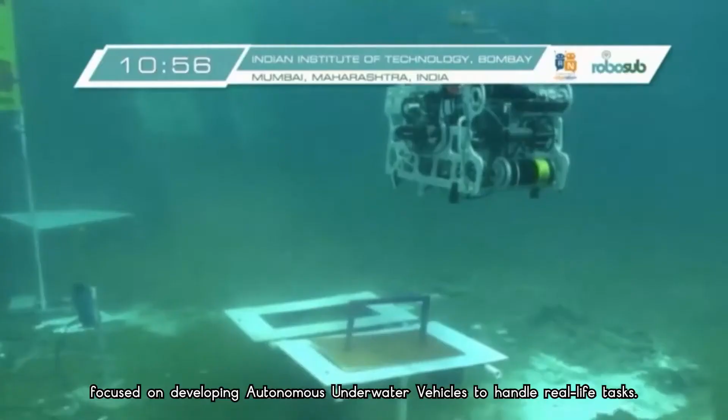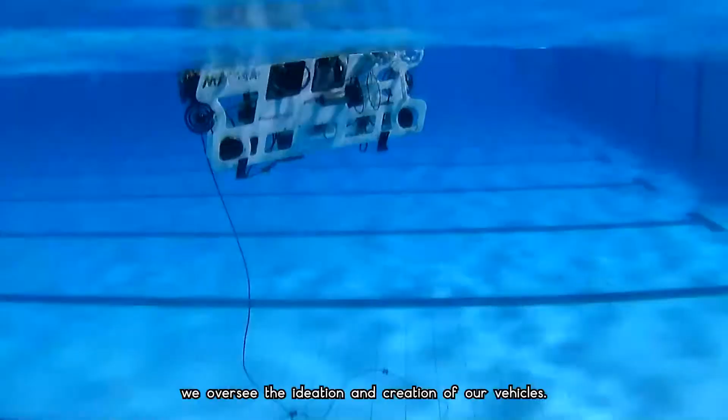AUV-IITB is a multidisciplinary team of 55 members focused on developing autonomous underwater vehicles to handle real life tasks. Through the consistent effort put in by members of our four subdivisions, we oversee the ideation and creation of our vehicles. Our flagship series is named Matsya, which is derived from the Sanskrit word for fish.

Hi, I am Sanjyoti Naran, a fourth year undergraduate from the Department of Electrical Engineering at IIT Bombay. I am the current team leader of AUV-IITB. Hi everyone, I'm Akshat Rajlat, a senior undergraduate student at the Department of Mechanical Engineering, IIT Bombay. I'm one of the current team leaders of Team AUV-IITB. Hi, I'm Mohan Abhyas, fourth year undergrad from Computer Science Department, and I'm one of the current team leaders.

I'm Nandagopal, a third year undergraduate from the Mechanical Department, and I'm the Mechanical R&D head of the team. And this is the Mechanical division of the team. Hi, I'm Shubham, third year undergrad from Chemistry Department, currently the Electrical Subsystem Head and the Design Team Head. And this is the Electrical Subdivision of the team. Hi, I'm Richard, third year undergraduate from Electrical Department, and I am the Software Subdivision Head. And this is the Software Subdivision of the team.

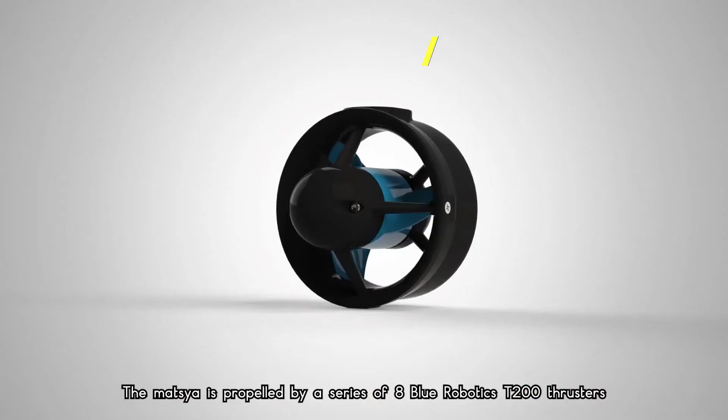The Matsya is propelled by a series of 8 Blue Robotics T200 thrusters based on brushless DC technology. The chosen thruster configuration ensures mobility in all 6 degrees of freedom while minimizing undesired residual torques. Special emphasis is given to ensure maximum torque is available in rotational axes for efficient control.

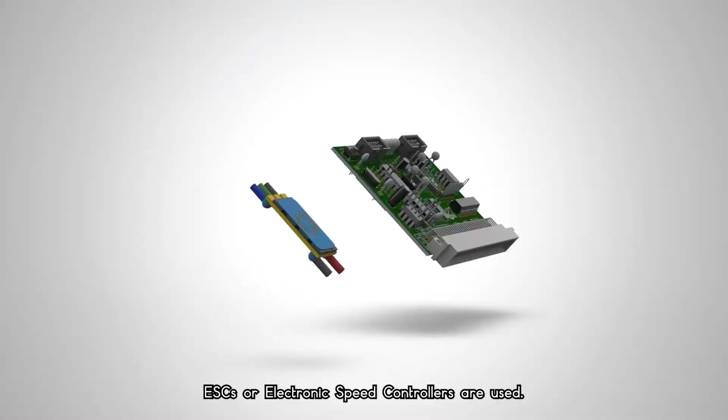To control the speed of the thrusters, ESCs or electronic speed controllers are used. PWM signals generated by the GPIO board are also applied. The board also features double redundancy in case one of the microcontrollers fails, thus increasing the reliability. It also features the thruster kills, which are the hard kill and the soft kill.

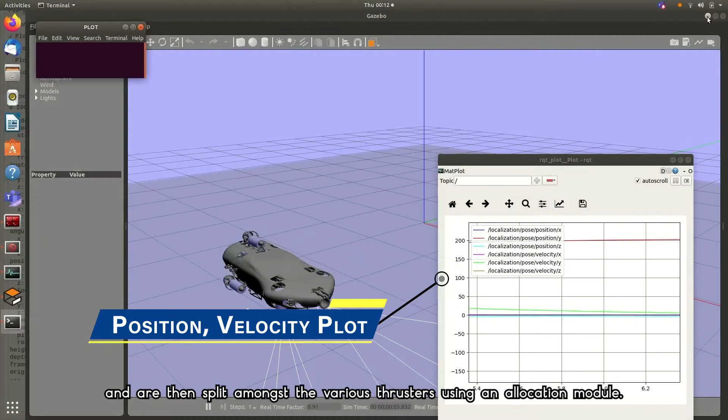Control is achieved by a PID-based feedback control structure. The required control inputs in the 6 degrees of freedom are calculated and are then split among the various thrusters using an allocation module. Finally, PWM values are computed using a thrust versus PWM mapping and are then sent to the various thrusters using the CAN bus.

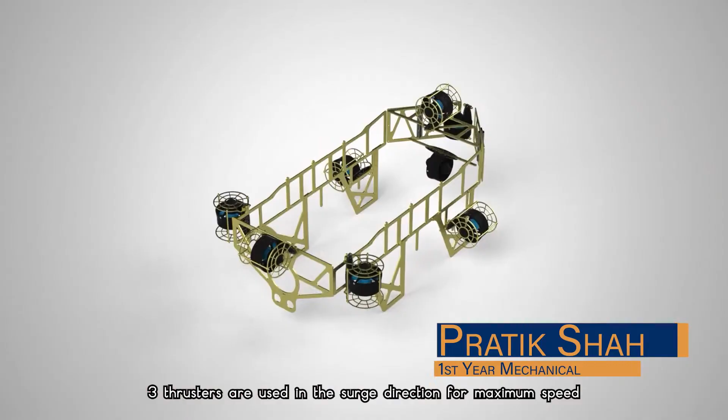Let's get acquainted with the specifications. The first thing required while designing the propulsion system is the requirement of speed in all directions and the total degrees of freedom. After considering the power requirements, the number of thrusters and their orientation is decided. Moving on to thruster configuration. We have a total of 8 thrusters. 3 thrusters are used in the surge direction for maximum speed, along with 3 in the heave direction. The 3 heave thrusters also help in pitch control.

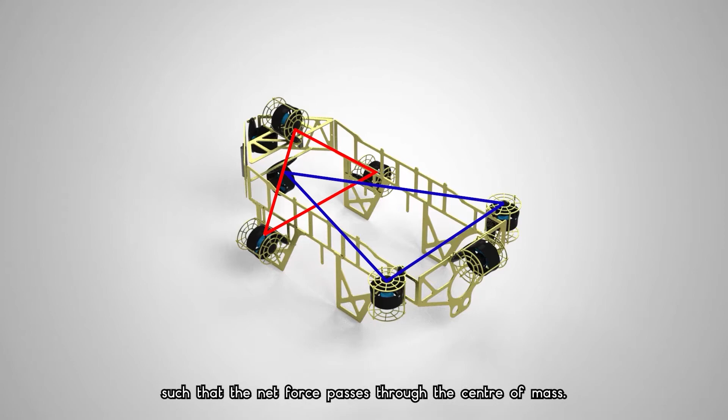A minimal amount of thrust is required in sway because there are few resistive forces, and so we only use 2 thrusters. We position the surge and the heave thrusters at the vertices of 2 distinct isosceles triangles such that the net force passes through the center of mass. This eliminates any undesirable torque. The sway thrusters are positioned as far apart as possible to give higher yaw torque.

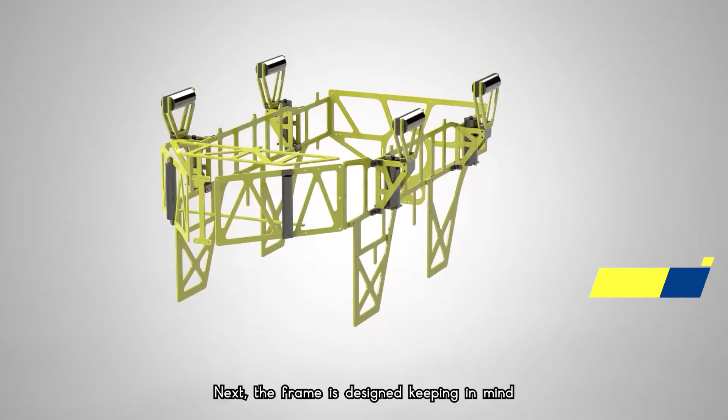Next, let's learn about frame analysis. Next, the frame is designed keeping in mind the positioning of thrusters, and its structural integrity is tested at maximum operation force via static structural analysis. Finally, we perform CFD analysis to estimate the drag force that the vehicle will experience and its maximum achievable speed.

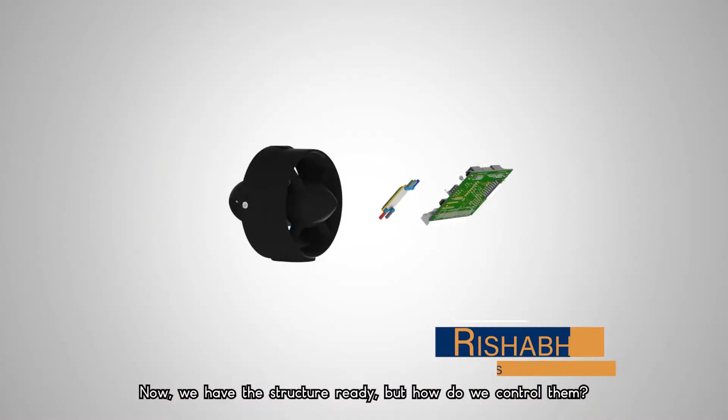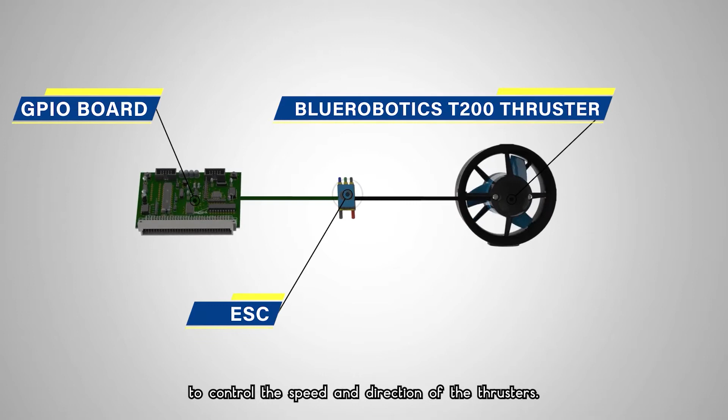Following all the mechanical aspects, we now examine the electrical elements. Now we have the structure ready, but how do we control them? To control these 8 thrusters, we have 8 ESCs present in the ESC hull. These ESCs use the PWM signals generated by the GPIO board to control the speed and direction of the thrusters. The ESCs can handle very high currents required by the thrusters, which can reach up to 25 amps. To tackle the heat generated by the ESCs, they're placed in a separate hull away from the main electrical stack.

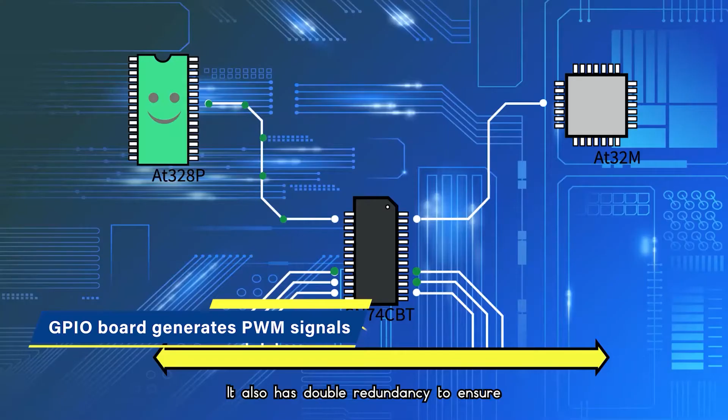Now it's time to meet the mastermind behind controlling the ESCs, the GPIO board. The GPIO board is responsible for producing PWM signals. It also has double redundancy to ensure that the board remains functional in the case that one of the 2 microcontrollers fails. This increases robustness and fault tolerance. The 2 microcontrollers utilized are ATmega 328P and ATmega 32M.

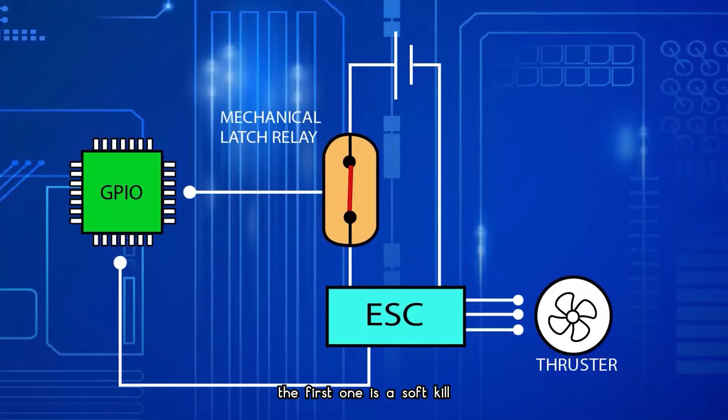Matsya 6 has two layers of kill protection against system failures. The first one is soft kill, which shuts the thrusters by cutting off PWM signals. The second one is hard kill, which shuts down the vehicle by breaking the connection between battery and thruster with the help of mechanical relays.

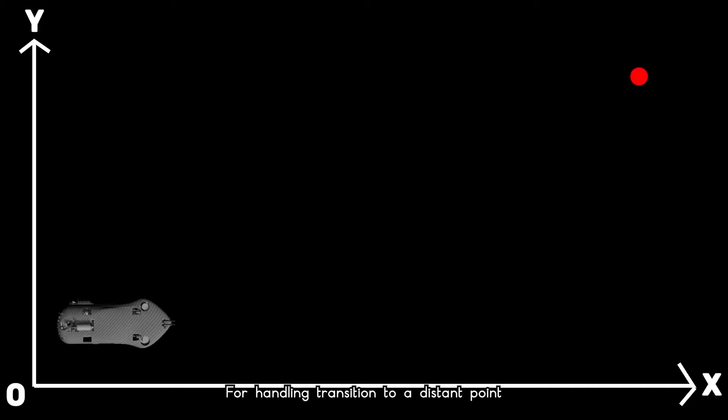Now we know how to propel the vehicle if we have the PWMs. But how do we calculate them? Welcome to the control system. For handling transition to a distant point, the navigation module generates a path depending on the requirement or the way we want to traverse the route. The navigator achieves this by breaking down the points into a series of set points.

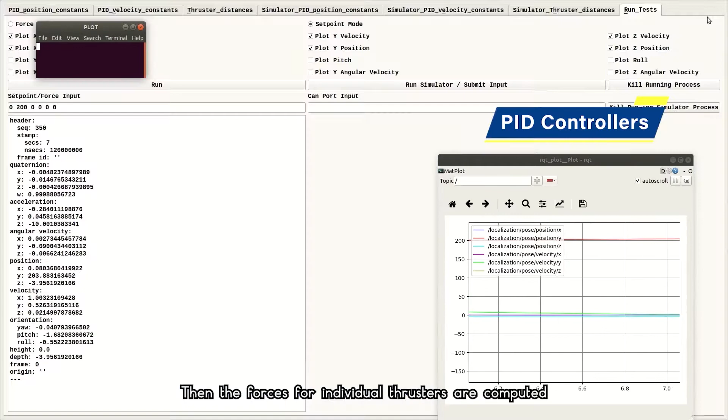The set points are then fed sequentially to the 6 PID controllers, which then compute the required acceleration in each of the 6 degrees of freedom. Then the forces for individual thrusters are computed by the allocator. After the computation of these forces, the PWM force model computes the required PWM signals, which are then sent to the thrusters to achieve the required propulsion. Congratulations! Now you know everything to design your own propulsion system.

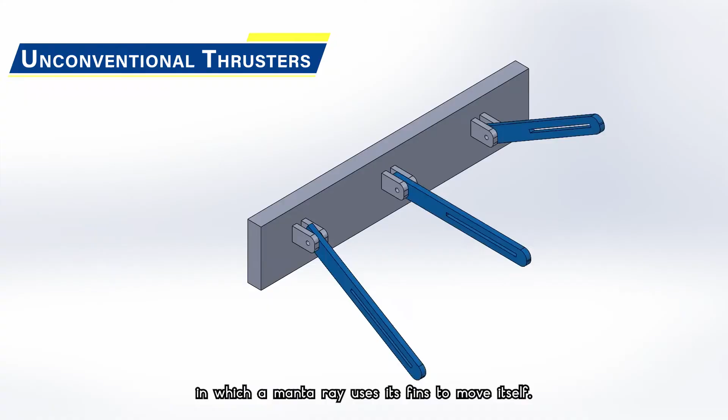Conventionally, we use propellers to provide thrust in a vehicle. We have already researched various mechanisms and systems to provide thrust. Undulating fins are found to be a popular bio-inspired mechanism in which a manta ray uses its fins to move itself. This mechanism was found to be very modular as it can act as a vector thruster, and the thrust provided can also be varied with the amplitude of the wave generated in the fin.

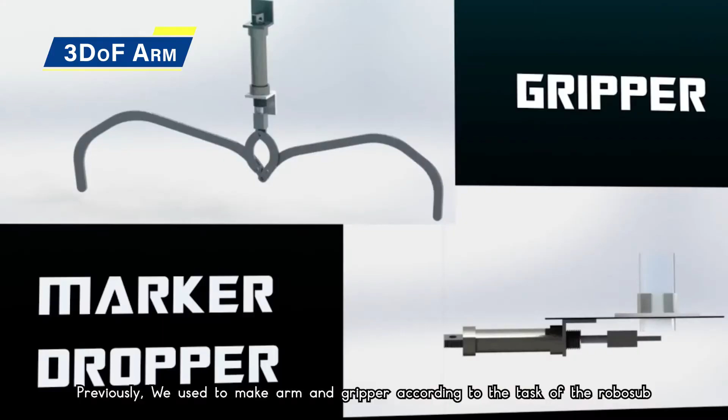Previously, we used to make the arm and the gripper according to the task of the RoboSub, and it needed to be rebuilt completely from scratch every year depending on the problem statement. So this year, we decided to make a universal arm that can be used for any task with the least number of improvements. This arm is a completely autonomous 3 degree of freedom arm, and it has gripping feedback and a replaceable end effector that can be designed explicitly for the task involved.

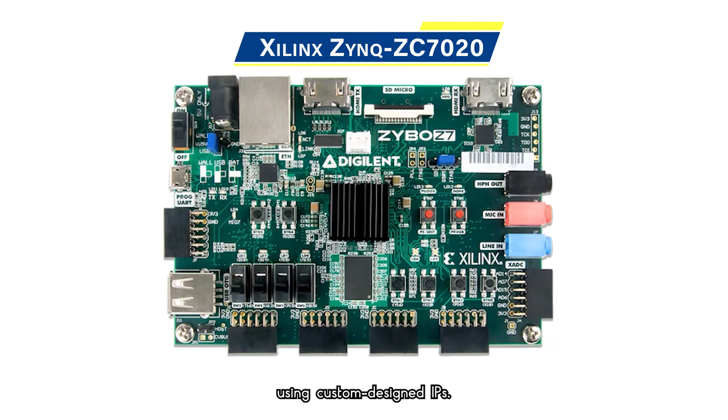Pinger localization on FPGA. This project was undertaken to replace the DAQ for faster and more efficient localization of static underwater targets. We implemented the TDOA algorithm on the Xilinx Zynq-ZC7020 FPGA using custom designed IPs. Using hardware for real-time processing also decreased the load on an SBC. The design and implementation on FPGA was successful in testing as well, thus replacing the DAQ.

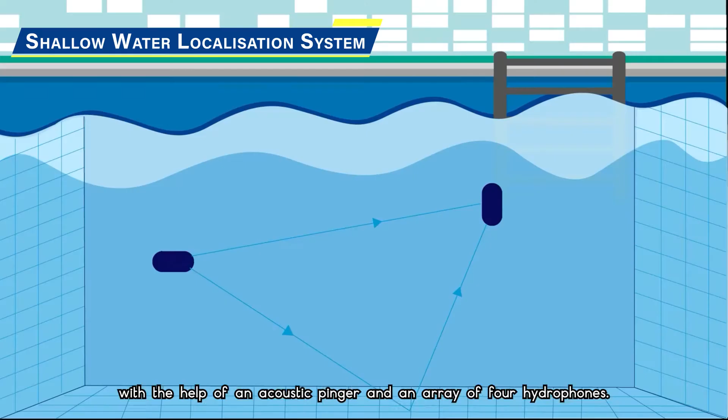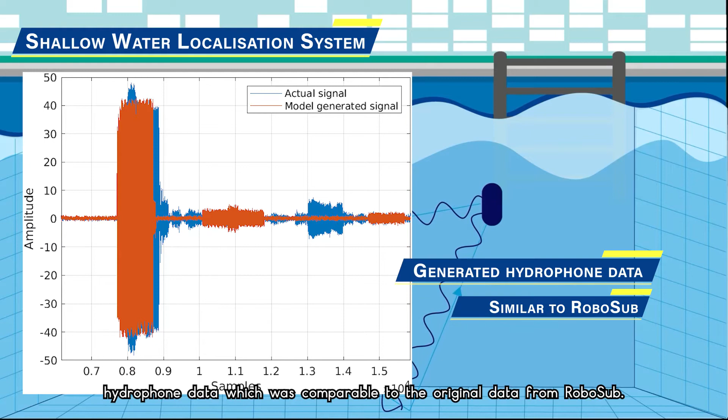We developed a model of shallow water localization system which also helped in modeling of the Pinger task. In this system, one AUV is used to localize another AUV with the help of an acoustic pinger and an array of 4 hydrophones. The pinger emits the ping in a swimming pool environment, created taking into account reflections, attenuation, and Doppler effect. With the help of this model, we were able to generate hydrophone data which was comparable to the original data from RoboSub. In our current algorithm, we added real-time ping detection in pinger localization.

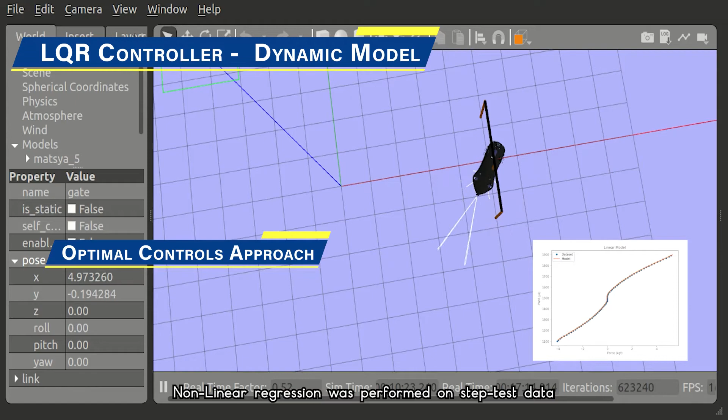Our current PID-based controller required extensive tuning and offered limited performance in non-linear systems. We moved to an optimal controls approach which gave better performance and reduced tuning. Non-linear regression was performed on step test data to estimate model parameters and to develop an LQR controller which solves the linear quadratic optimization problem based on full state feedback. LQR optimizes both for state error as well as control input and gives the designer the choice to weigh energy consumption versus performance.

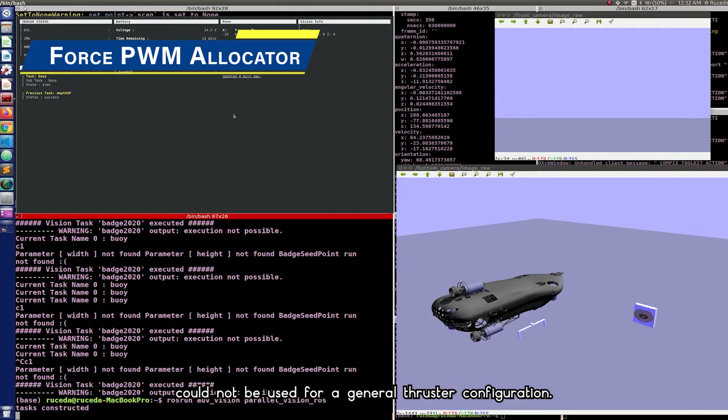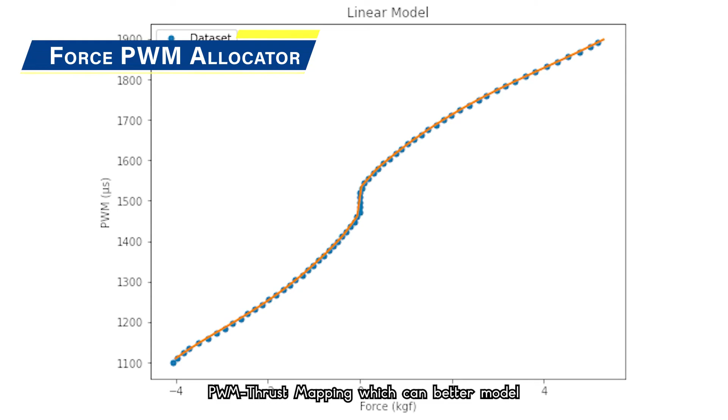Our previous allocator used a cascade of conditional statements which was computationally expensive and could not be used for the general thruster configuration. Our new allocator uses a pseudo-inverse of the input matrix with provisions for thruster saturation. To accompany this, we developed a more refined PWM thrust mapping which can better model the complex non-linear relationship.

For effective obstacle avoidance in underwater environments, it was necessary to include a path planner module in the navigator. The team developed an artificial potential fields-based path planner that could return smooth paths for traversal through the RoboSub environment without the need to maintain a grid map of the domain. To aid the performance of obstacle avoidance, we integrated our path follower module, which fits splines to the given set of points and feeds targets to the controller. This module has been tested extensively in the simulator.

Most existing video denoising algorithms assume a single statistical model, which often is violated in practice. We applied the low-rank matrix completion algorithm without considering any noise model for denoising videos corrupted with Gaussian, Poisson, and impulsive noise. It outperforms standard denoising algorithms like video block matching and 3D filtering, BM3D, and Principal Component Analysis, PCA.

Hello, I'm Vinayak, a second year undergraduate from the Material Science Department and a member of the Business Subdivision of the team. I'm the lead in charge of video presentation for RoboSub 2021. Hi, I'm Nandini, a first year undergraduate from the Chemistry Department and a member of the Business Subdivision of the team. I worked on designing the flow chart and created all of the illustrations used in the video.

Hi, I am Abir Mishra, a first year undergrad from the Physics Department and a member of the Business Subdivision of Team AUV IITB. I have been responsible for the video editing and animations part. Hi, I'm Sanya, a first year undergrad at the Material Science Department and a member of the Business Subdivision. So I was responsible for the script and narration of this video, and this was Team AUV IITB.